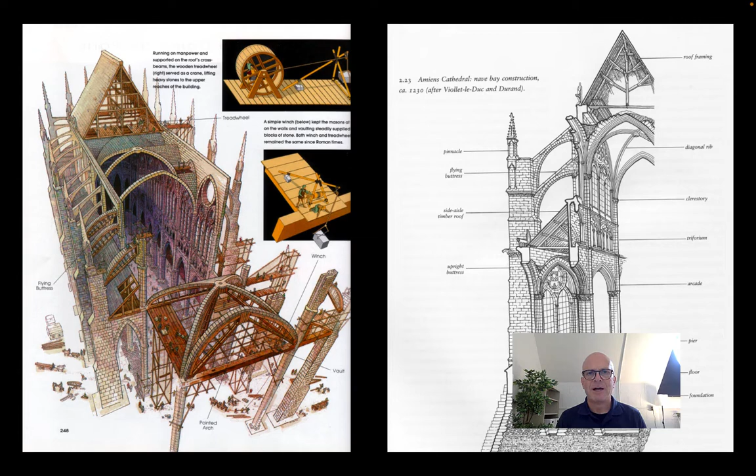Gothic cathedrals are maybe one of the best examples of the constructive achievement being equal to the structural or functional achievement, in that they are a great example of an organized, partly skilled, partly unskilled labor force that puts its knowledge to use in the service of not only actually getting the job done, of building the actual structures, but of refining the basic principles into something that's a really coherent, really integrated architectural experience.

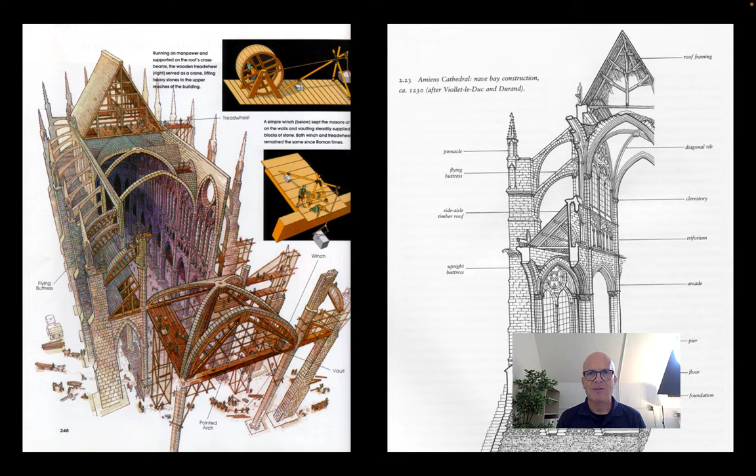And it's the stonecutters really who have in their hands not only the structural performance of the building, but also the way that it impacts us, the way that it affects us. The Gothic job site must have been one of the most impressive sites in human history. Maybe not the scale of the pyramids, but in terms of the organization to get these things built in the amount of time that they were, even though to us they seem like incredibly long periods, they were done usually in bursts of a few years at a time, right?

A town would have the funds, would be able to recruit the builders and the labor force to have a campaign to build a portion of the cathedral, maybe the choir or the transept. They were often built in phases that saw an incredible amount of energy devoted to them over relatively short periods of time. And they were incredibly sophisticated.

We have evidence that some of the machinery that we saw in Roman construction, you see on the left a hamster wheel being used to raise a large block of stone, that these were used. We have evidence of winches, of cranes, of building machines that hadn't been seen in Europe for several hundred years being put to use to build these. But maybe more important was the transmission of knowledge and the organization of the labor force.

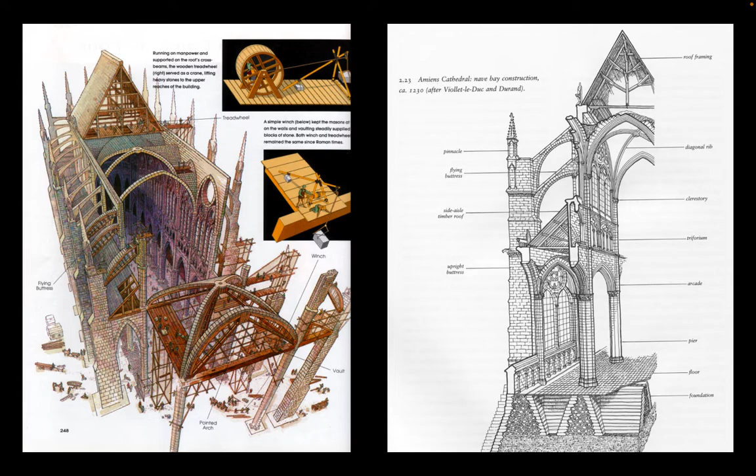The guild system ensured that the stone cutters were well trained, that they came up in the profession and not only knew how to carve the stone, but knew what the traditions were, knew what the local preferences were. And the ordering of the job site, the hierarchy of having a master builder, master stone cutters, a sort of brigade system of workers, ensured a consistency through the job site that meant that the cathedrals as they're left to us today almost feel like they're industrially produced, right? There's variation, but the variation is subsumed within the overall order.

And we can look at the buildings themselves and see the way that stones were cut to various standards to understand that there was a clear hierarchy, that there was a systematic approach to carving, to moving the stones, to putting them into place. But we also have a couple of other pieces of evidence, in particular the sketchbooks of Villard de Honnecourt, who was apparently trained in building arts, but was also just something of a fanboy and seems to have gone around to construction sites sketching what he saw builders doing. Some of these are plans, but he also drew, as we saw in an earlier lecture, pictures of the machinery that he saw being put to use on the job sites.

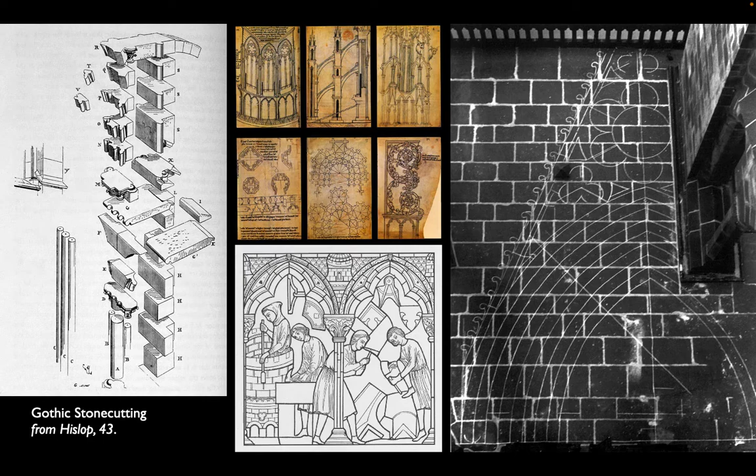Sometimes this labor force was mobile. They would go from job site to job site whenever a town had the money. The master builder would show up and begin work, and might move on to another town when the funds ran out. But we also see the development of the Gothic type benefiting from this repeated iteration of the same type over and over again, with a skilled workforce that passes down its knowledge, right, from generation to generation.

And this, I think, explains this phenomenon of what's known as the early Gothic and the high Gothic. And you remember we talked about the early Gothic being sort of working out the solution to the problem, right, finding a way to create awe-inspiring spaces large enough to hold a decent-sized congregation, but also lightweight enough to allow for plenty of daylight and eventually plenty of stained glass windows.

These basic components of the solution don't necessarily create a coherent architectural experience. It's only with the repeated construction of cathedrals, and the understanding of underlying principles, teasing out similarities, bits of order, bits of proportion, and finding ways to do things that look right, and building on those, that lead us to what we call the high Gothic.

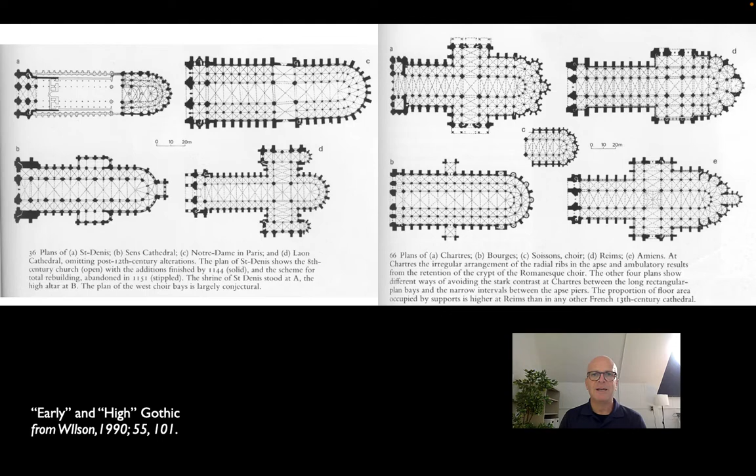This is the total integration of the liturgy, the structure of the building, and the architectural experience of being within it. Some of this is just the scale of the building, and famously there's a progression you can draw of Gothic cathedrals getting taller and taller as builders get more confident in their abilities with stone.

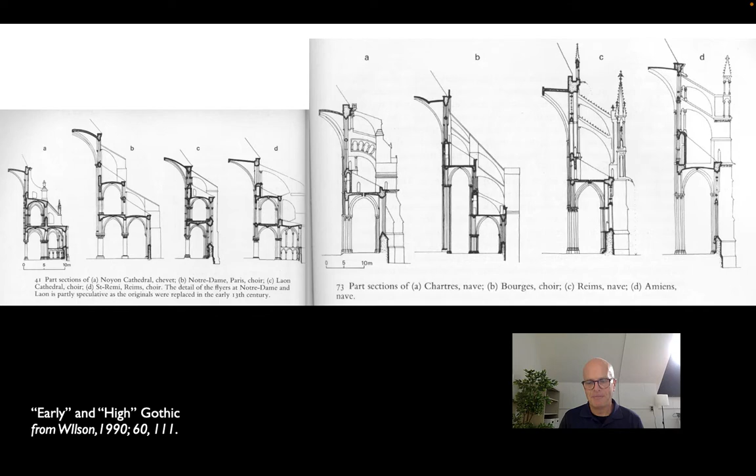Also, as the type proves itself at different scales, it's one thing to build a building twice as tall as the previous one, and another to build one that's maybe 5 or 10% taller. You can see all of these as cautious steps toward the height these buildings would eventually reach.

But there's also a change in the style, a change in how the buildings feel when you're in them. To explain this, we'll look at a couple of early Gothic buildings, most notably Notre Dame, certainly the most famous and recently the most tragic of these, and compare them with high Gothic to show how the stonecutter's art transformed the Gothic solution into something of a coherent piece of architecture.

Notre Dame has been built and rebuilt over and over again, and a lot of what we see, particularly the spire that collapsed in the fire a couple of years ago, and the flying buttresses, are actually 19th century reconstructions by Viollet-le-Duc, a theorist we'll talk about in a couple of weeks. But the interior shows, in large part, the original fabric, at least in the lower couple of stories.

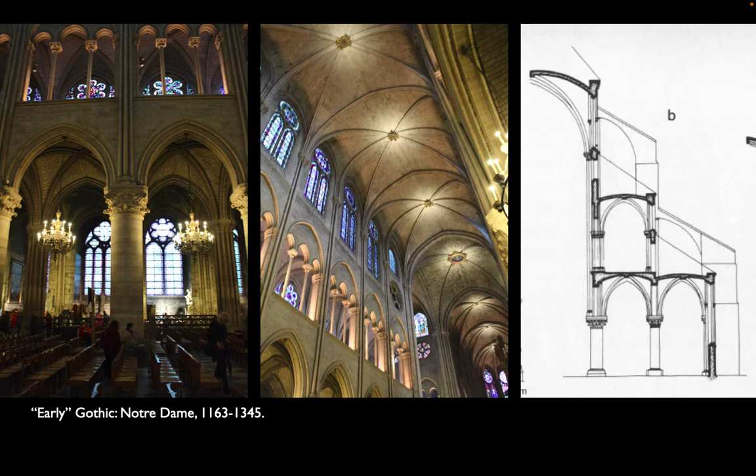You can see in the photo on the left this trope of the piping from the vaults coming down and sitting on the Romanesque pier - a giant column that collects all of the ribs, all of the arches, and puts it on one single piece.

The other thing you can see is the type of vaulting that Notre Dame has, called sexpartite vaulting. Each square module is divided into 6 separate vaulted pieces - 2 wide ones along the longitudinal axis, and 4 smaller ones dividing the side panels into 2. That creates a regular rhythm in the piping coming down the walls, but a slightly visually confusing rhythm in the roof itself.

Notre Dame also has 2 aisles, as you see in the section on the right, which means it needs 2 stories to get the roofs over those aisles. So down at the base, the windows are actually quite far from the nave - 2 aisle widths away.

Interestingly, Notre Dame was redone in the 13th and 14th centuries, and they actually changed the wall paneling. You can see in the center photo the last bay of the nave - that's the original division, the original elevation into 4 segments: an arcade, the gallery, the triforium, and what was called the clerestory. In the bays in front, you can see more of a high Gothic division into 3 bays: the arcade, the triforium, and just the clerestory. This is a crucial aesthetic refinement we'll talk about here in a second.

Even though it's not something that we can find stated very often, it's clear from the development of the buildings that there's an urge towards better or more idealized proportions in the high Gothic. One of the major steps toward this is the change from those six-part vaults to simpler four-part vaults. Notre Dame on top—you can count the vaults in each module, and there are six of them.

In the high Gothic, they tend to go toward quadripartite vaulting. If you look at the bottom photo, each vault now is basically a half square, and it has four vaults instead of six. Robert Mark suggests this is due in part to a structural reason. In the comparison drawing on the upper left, the sexpartite vault has a greater longitudinal thrust, and the quadripartite vault has a lesser one because of the shallower plan angle.

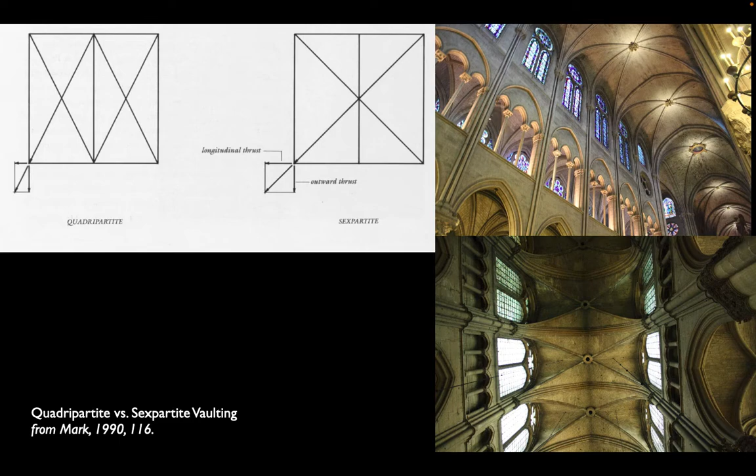This gets to be important at the ends of the cathedral, both at the apse and at the nave, or at the narthex. The narthex needs giant towers to stabilize the last bay of vaulting. Mark suggests that the longitudinal thrust is actually less with quadripartite vaulting because of that shallower angle, so the towers on one end and the apse on the other end need to do less work to bookend the thrusts of the vaults.

I think, though, that there's also a visual component to this—that the sexpartite vaulting makes a disconnection between the way the roof feels or looks and the way the interior elevations feel or look. Quadripartite vaulting means there's one module for the walls that matches the module of the ceilings, so things are integrated formally and visually.

Here you see three of these interiors—Chartres, Amiens, and Reims—where you get a sense that the proportions of the walls and the proportions of the roof are both in line, that they're both kind of singing the same song in a way. You can see too the development of those interior elevations, that they are both more integrated and more open, more light than in the original of Notre Dame or some of the earlier Gothic churches we were looking at.

Jantzen, in his book High Gothic, talks about the fact that this comes from both that simplification—going from four bays to three, making each of the three bays taller, more attenuated—but also being braver with the kind of openness of the remaining walls. Jantzen says that the early Gothic walls all look like they are solid walls pierced with windows, but beginning with Chartres we start to see the builders thinking of them as open spaces filled with delicate stone tracery—instead of solid walls, we see stone skeletons holding the glass in place.

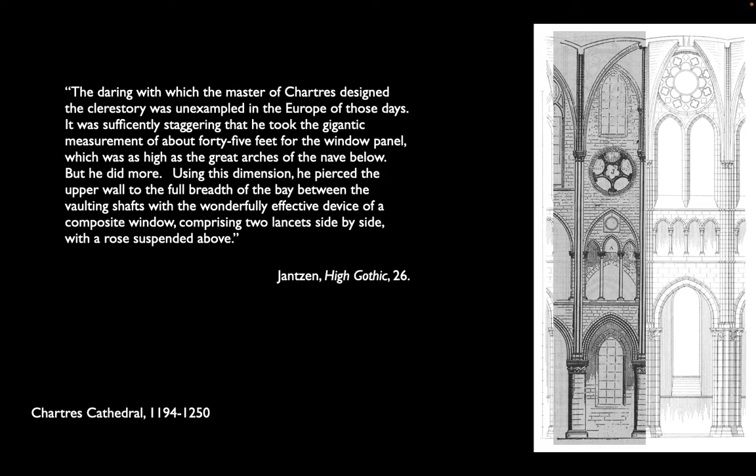This is Notre Dame on the left, Chartres on the right. You can see not only are the proportions of each bay, or each level, more vertical—reinforcing the verticality, reinforcing the height of the space—but there's also less solid wall, more openness, more glass in the bays of Chartres.

This really culminates in Amiens, which is the tallest of the major Gothic cathedrals, and also the one with the tallest arcades, the slenderest proportions of those side elevations, and the most glass proportionately in the openings. You can see the quadripartite vaulting, and you can see that the ribs all get refined into piping that comes all the way down to the ground. No longer do these structural elements seem to sit on heavy piers as they do in Notre Dame—now they visually come all the way down to eye level, which integrates or ties together the interior quite well.

Here you get a sense both for the piping and the kind of relentless nature of it—every rib is detailed onto a piece of piping that comes all the way down the piers to the ground. You can also see the amount of glass, the amount of light coming in from the top and really illuminating the space—divine light, light from above, illuminating both our space and, if you buy into the Augustinian theology, also illuminating our souls. You can see also in the shot on the left the cracks that Jacques Heyman talks about as forming essentially hinges in the vaults that allow the structure to be a bit ductile.

And here on the exterior, you can see Amiens' flying buttresses, which enable it to reach the height that it does.

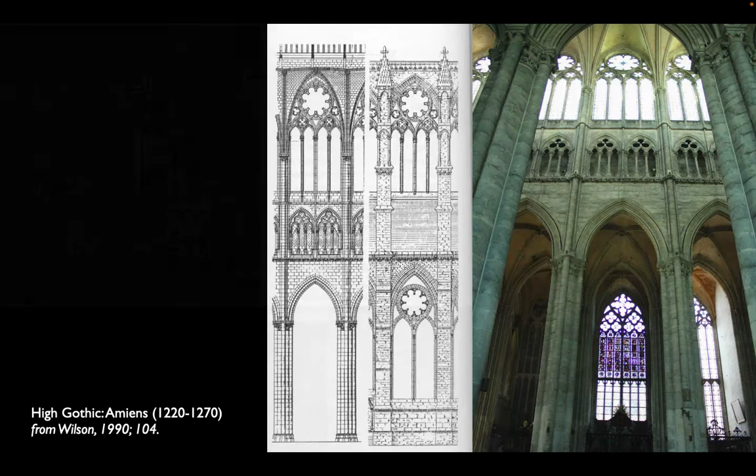Here on the interior, you can see that everything is integrated. The proportions of the lancet windows match, so there's a continuity between the proportions of the arcade arch and the proportions of the arch of the lancet windows in the story above. Visually, Amiens is entirely integrated. It feels like one idea is generating all of the details, all of the forms, in a way that Notre Dame, for all of its fame, really doesn't. That is down to stonemasons understanding not only how the structure works, not only how to build it, but beginning to develop the visual refinements that make it into a really coherent experience.

This evolution occurs with the structure as well, and if Amiens is probably the finest visual example of the high Gothic, Bourges, at least according to Robert Mark, is the structural ideal. He says that this one is proportionately the best. It has the widest stance, the widest section of the high Gothic. It's a little unusual in that it marries high Gothic aesthetics to a double-aisled plan.

So you have that problem of the nave being far from the ground floor windows. But to Mark, who's largely a structural engineer, the section has got it right, that the buttresses are at such an incline that they are working at maximum efficiency, as opposed to some of the taller or steeper buttresses that you see in some of the other churches. The fact that Amiens and Chartres are maybe more famous than Bourges perhaps tells you all you need to know about the relationship of pure structure to visual experience.

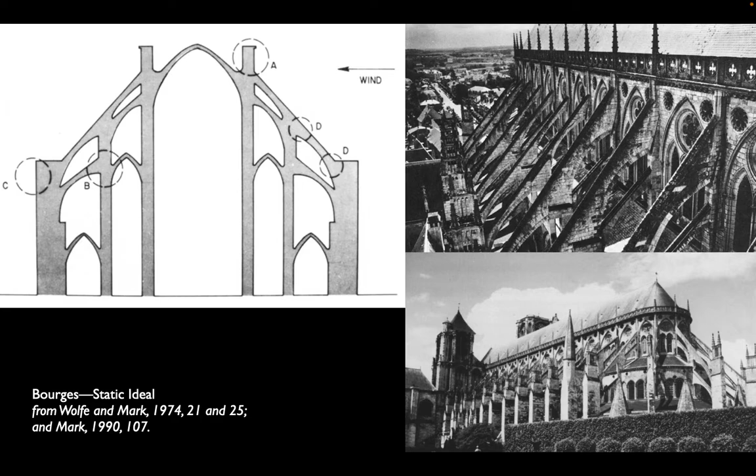Well, over time, tastes change, and a structural language that initially develops as a kind of pure response to functional needs becomes a motif, becomes the generator more of effect than of performance. We see what's called the Rayonnant Gothic emerge in this royal chapel in Paris. It's a relatively small structure, but one where the emphasis isn't so much on revealing or refining the structure—it's on completely hiding the structure, making it disappear in our experience.

It's easy to do in a building the size of Sainte-Chapelle because it doesn't really require flying buttresses—it's a relatively small space. But you can see that the builders here have put the fin walls that support the thrusts of the pointed vaults completely outside of the space. They've decorated the piers in a way that makes them almost dissolve or disappear. The amount of glass in the building proportionally is much more than anything we saw in the high Gothic buildings, and there's a sense here that the builders are going more for effect, trying to emphasize the sublime nature of the space, a mystery as to what actually holds it up.

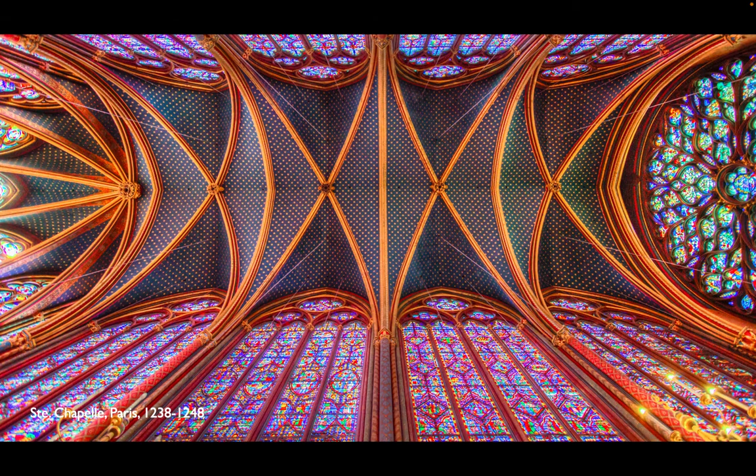And we start to see too a more decorative approach to the vaults—instead of letting the stone speak for itself, there's a covering here, colors and paints that make it much more of an interior visual experience than a structural one.

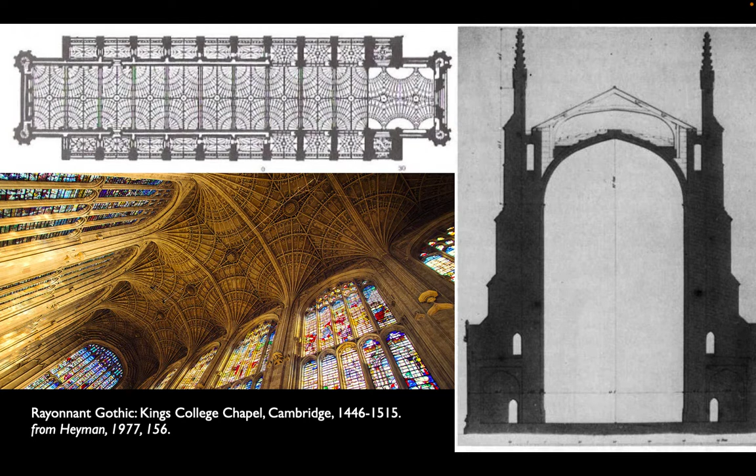And this happens too in Britain. England follows about 50 or 100 years behind France as ideas migrate across the channel. But we get builders who play around with the language of the structure too. So here, King's College uses what are called fan vaults instead of pointed vaults—these inverse conical vaults that work structurally, but are much more difficult to build and are much more an expression of the prowess or wealth of the college, that they can afford such sophisticated stonemasons to build vaults like this.

Here you can see details of the fan vaults, which work essentially as they collect the loads in the same way that the pointed vaults do in the high Gothic—just a rounded shape instead of a pointed shape. You can see the rubble fill that works very much as the tas-de-charge does in the classic Gothic buildings.

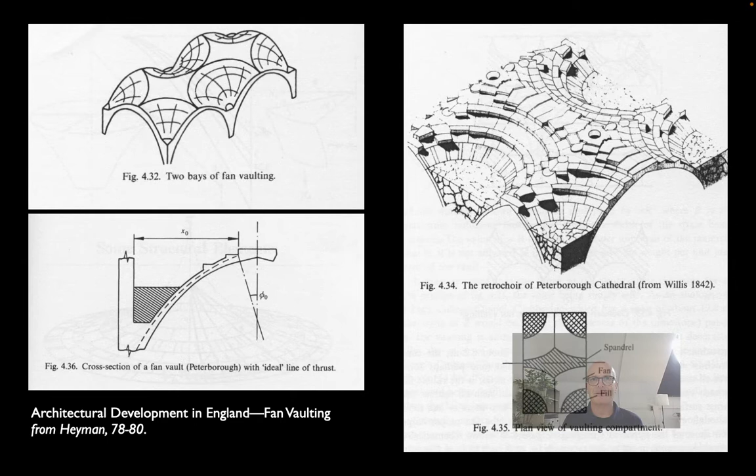So in the last segment of this lecture, I want to look at what happens when the Gothic principles get pushed to extremes—reasons that maybe the Gothic fell out of favor, or at the very least, how at a certain point the medieval science, if not the craftsmanship, began to fall short of the ambitions of their builders. We'll look at one famous building failure and another success that nevertheless points out what's left to do in the development of a true building science.